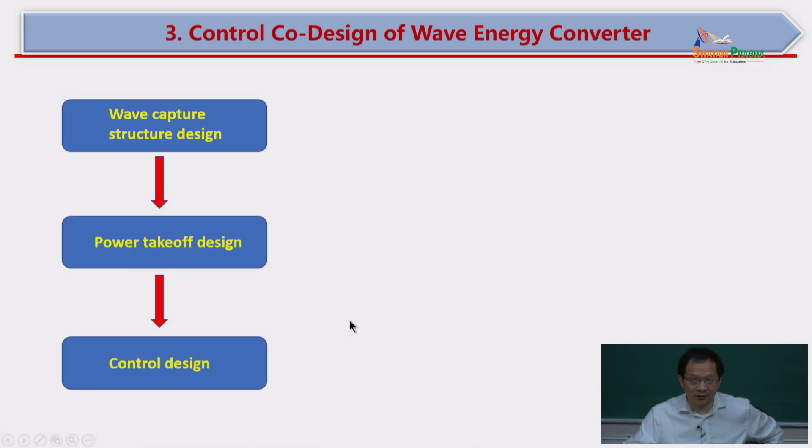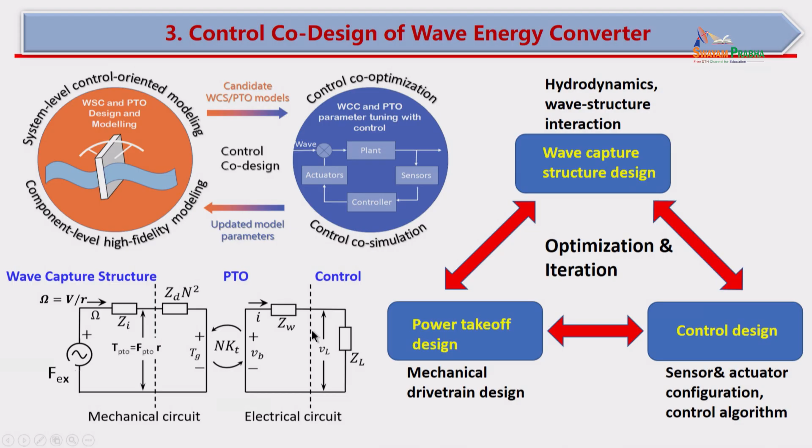And therefore, we want to have control co-design, which is basically optimization and iteration considering all three elements: wave capture structure, PTO, and control system. Why do we need to consider them together? If you learn electric circuits, you can model the whole system using electrical elements. When you harvest energy, every system has input impedance and output impedance. You need to match the impedance, and then you get maximum power output.

If you design the system only with, for example, PTO design, and you didn't consider the power takeoff electric component, you can take the maximum power input. But maximum power input is not necessarily maximum power output. So anyway, you need a certain level of consideration for the overall system. So in this class, we are also going to teach control co-design.

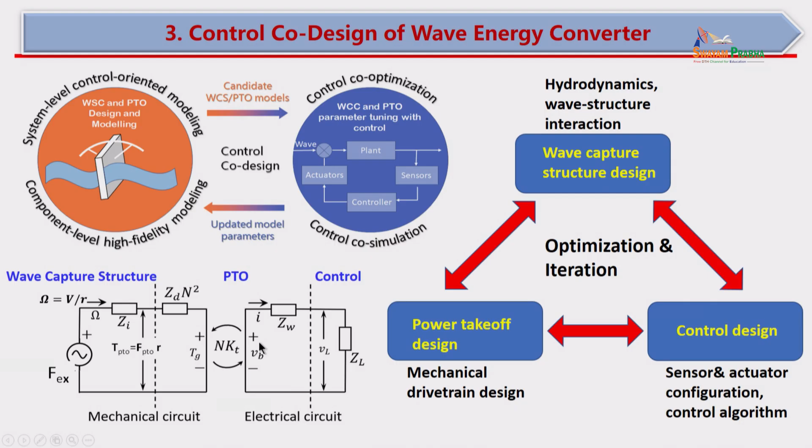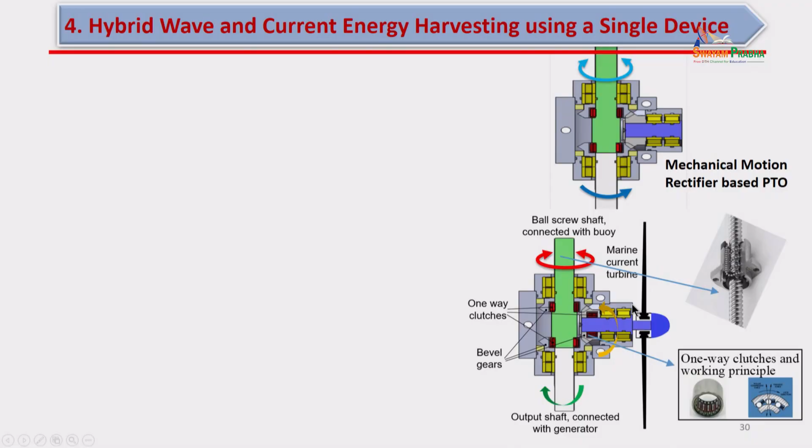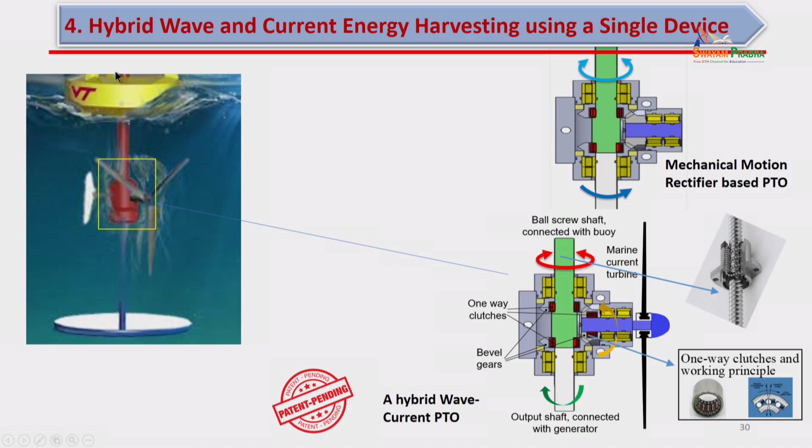Another very interesting thing I want to show you is this figure, the gearbox I mentioned with one-way clutches. These two figures look almost the same, right? But you have another turbine, and another difference is a third one-way clutch. In this system, you build a hybrid wave and current energy converter. How does the hybrid system work? The buoy moves up and down to drive one generator, and the turbine also drives the same generator. In that way, we can get energy from both sources.

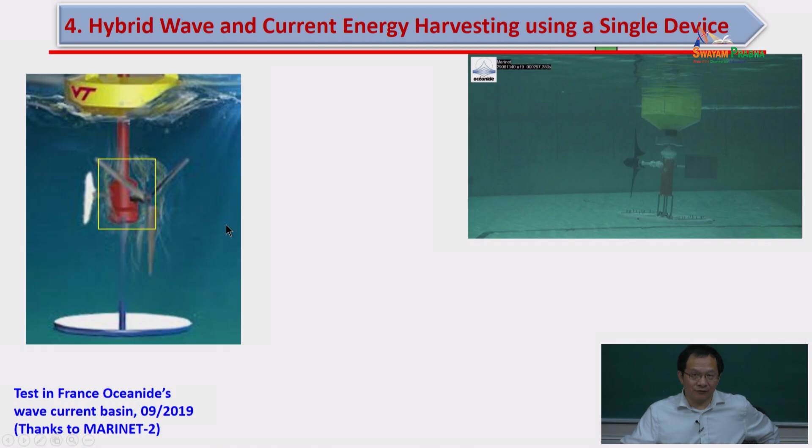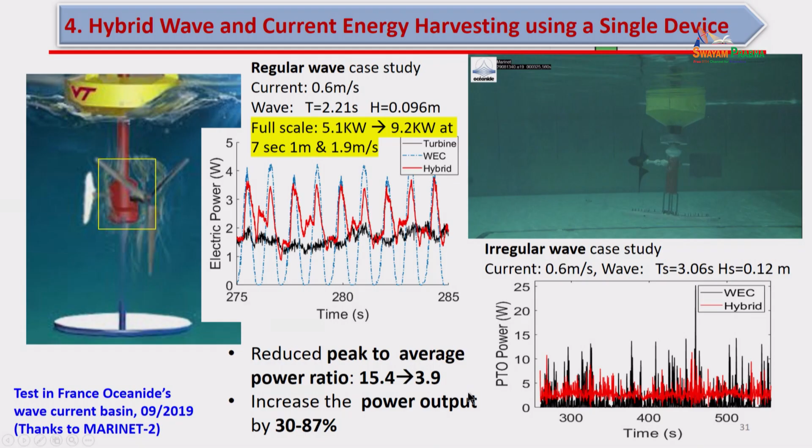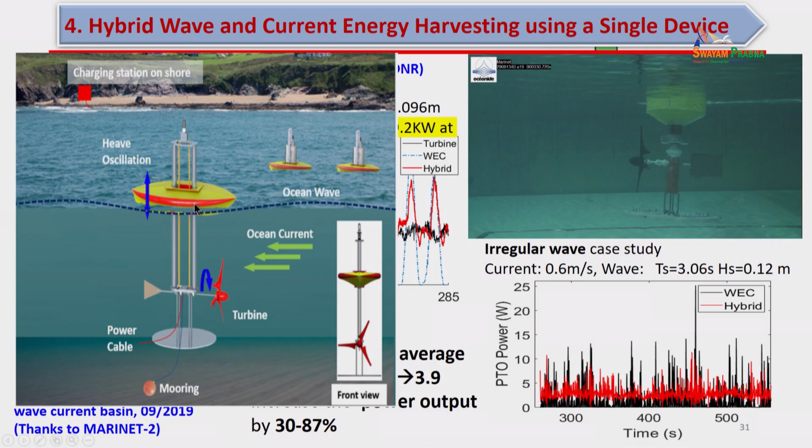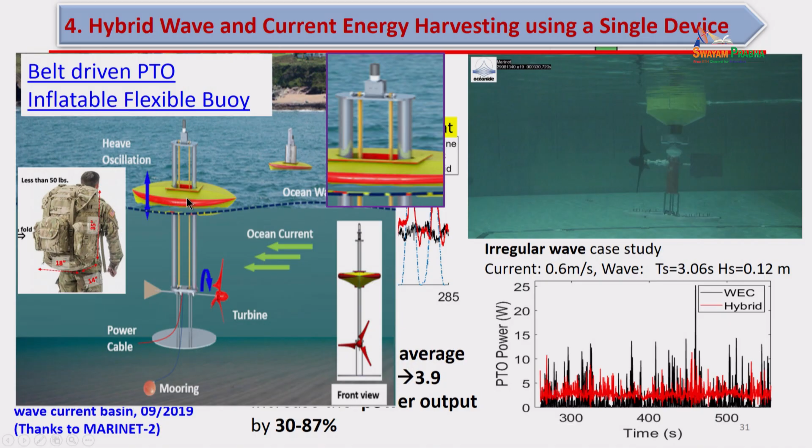Then we are working on a project for flexible, portable application. What is this system? You want to put it in a backpack, quickly assemble it, and put it in the ocean. So we use an inflatable, flexible buoy instead of a rigid one. We also use machine learning to optimize the shape. Instead of using CAD or SolidWorks to make the drawing, doing the simulation, and going through MATLAB simulation, we can use a machine learning process with one software to quickly do the iteration.

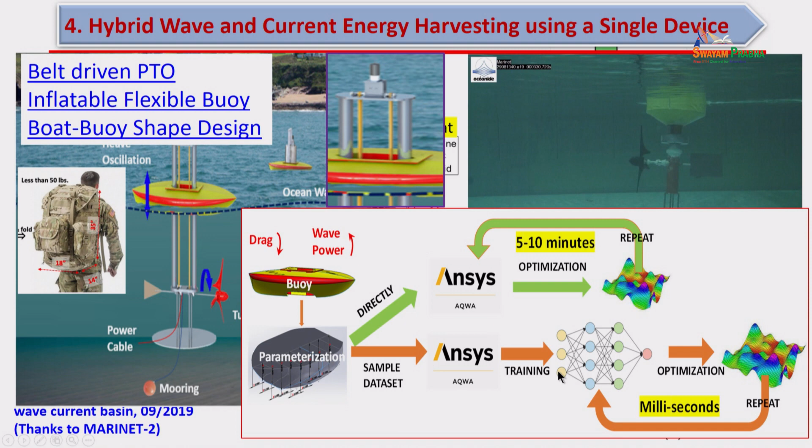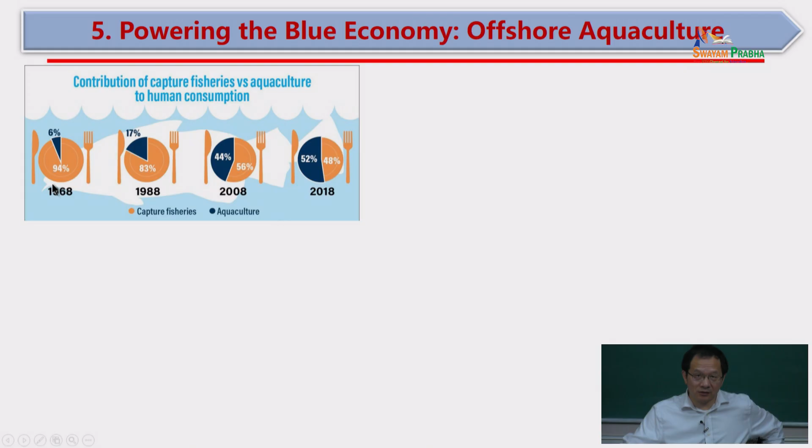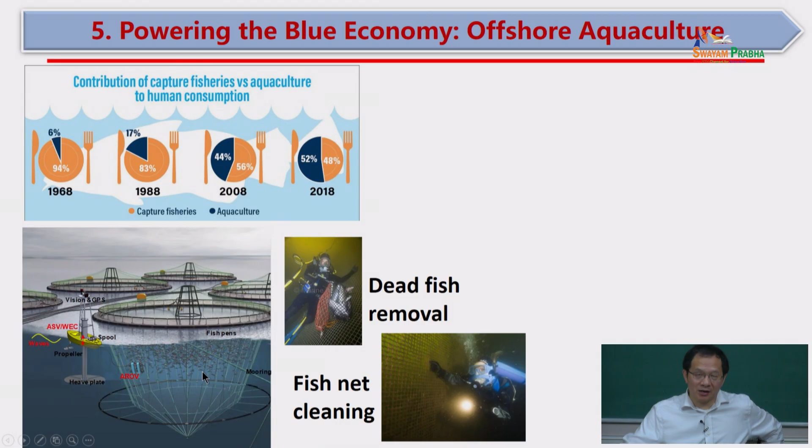The fifth sample project is aquaculture. Nowadays, more and more seafood comes from aquaculture, not wild caught from nature. We did a survey of aquaculture companies, and they gave us feedback on the two most important things they need. One is fish net cleaning; so far, they have divers do the cleaning work every month. Another is dead fish removal. If there's dead fish there, big marine wildlife will come and break the net, so they also use divers for this work.

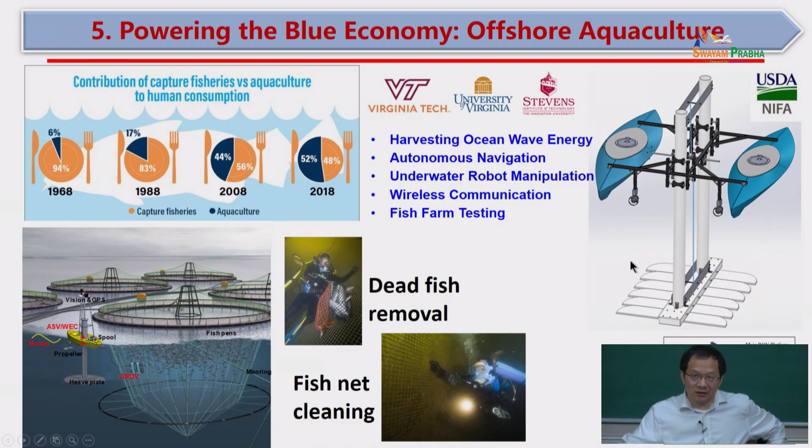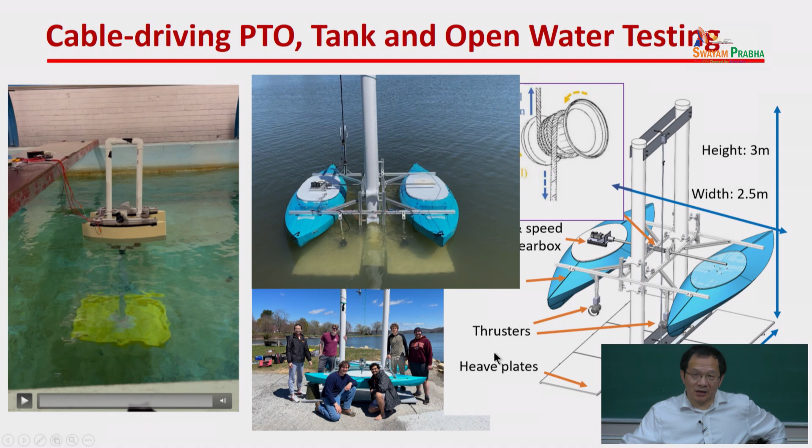Instead of using divers, we propose to use an underwater robot to do the cleaning work, with a wave energy converter to harvest energy. That project is funded by the U.S. Department of Agriculture. We advised our student team, and they designed a cable-driven PTO and built the system. We tested it in the tank at small scale, and tested it in a lake.

Another very important thing is how to drive research convergence. As I said, this field is really multidisciplinary.

Mechanical engineering, ocean engineering, electrical engineering, civil engineering, it involves everything, but it's not enough. This is just engineering. We need to consider the environmental impact. Ocean is a shared asset, right? It's not just one organization. You have fishery or water transportation, or defense; they need to share the water. So we need to consider the environment, we need to consider social impact, and we also need to consider the coastal community.

A common mistake a lot of engineers make is we design something, we test it in the lab, we try to put it in the market, we push, we convince the end user, the community, to use it. Sometimes we even try to give it to the community for free, and we design a system we can install for you. We feel very proud of ourselves: wow, we are good guys, we developed something to help the community. But we didn't ask them, is that what they need or not? Is that what they want or not?

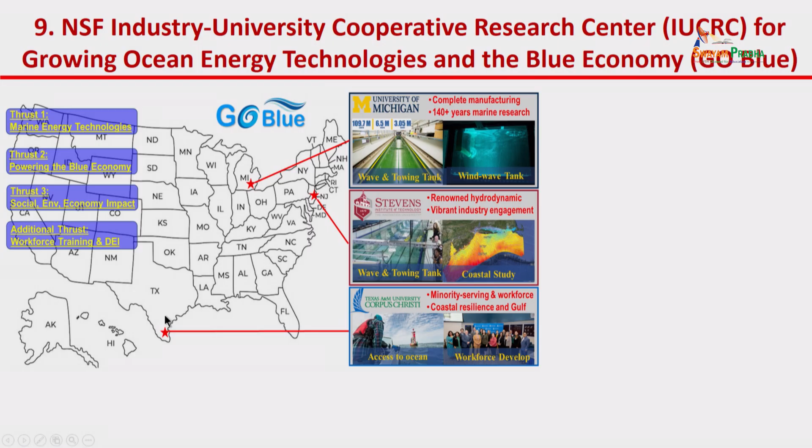Industry engagement is very important. We cannot just say the university side has some idea; we need to know the industry need. For this reason, I created an industry-university cooperative research center, GO BLUE, Growing Ocean Energy Technology and Blue Economy. University of Michigan is the headquarters. We also have Stevens, across from Manhattan on the New Jersey side, and Texas. In this center, we work on technology readiness level 3 to 5, basically industry-driven research with specific application in mind. This we usually call the valley of death.

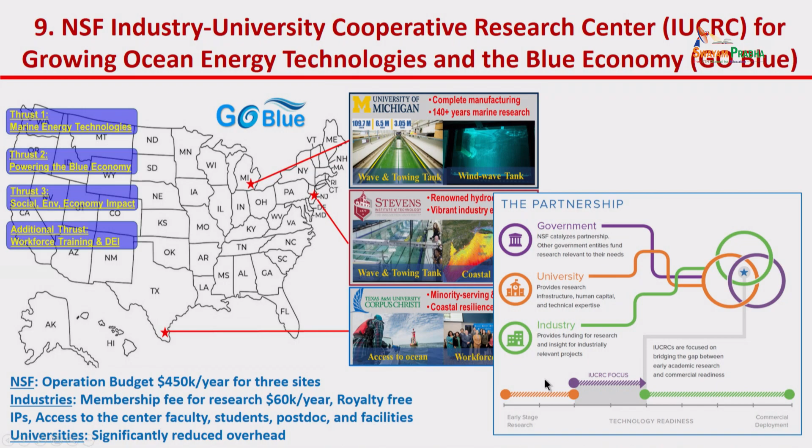University is usually here, industry here. Much university research just gets published in a paper, then dies. We want to bridge the gap. We have about 40 core faculty members from 3 universities. We look into dynamics and modeling, power converters and storage, power management, then the environment and society side to power the blue economy. So overall, wave energy is really multidisciplinary research.

My work in this field really engages multiple disciplines. In my group, I have PhD students with bachelor degrees in ocean engineering, electrical engineering, mechanical engineering, and material science. Really different backgrounds. I want to drive research convergence, and for some students I invite professors outside the college of engineering to be committee members so they can learn policy, community engagement, and professional skills. So I just gave you some sample projects to give you a sense of what we learn in this course.

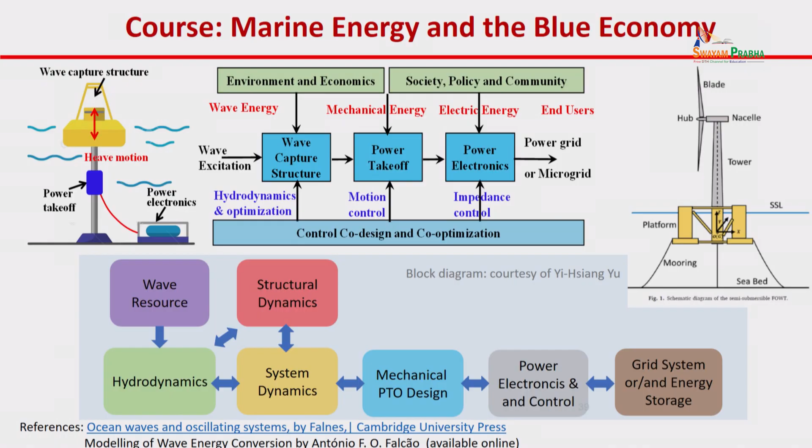You get the sense what kind of thing we need. Vibration, fluid, wave dynamics, mechanical design, PTO, and electronics control, experiment, right? That is what we are going to learn. In that you get a sense of the design side, fluid side, electric side, control side, and in addition to that, we are also going to learn very briefly ocean current and offshore wind.

After this introduction, we are going to review vibration energy harvesting. Then we talk about wave theory and hydrodynamics. We talk about wave structure interaction, wave energy converter modeling in frequency domain, modeling in time domain, and we are going to talk about the oscillating water column, and maybe we can skip a little bit because of the students' background. Then we are going to talk about power takeoff design, control design, numeric modeling, and if we have time, mooring systems, tank tests, and wave current interaction.